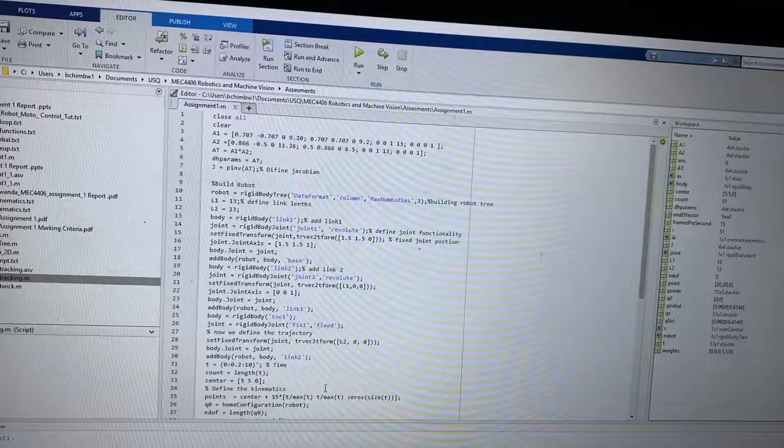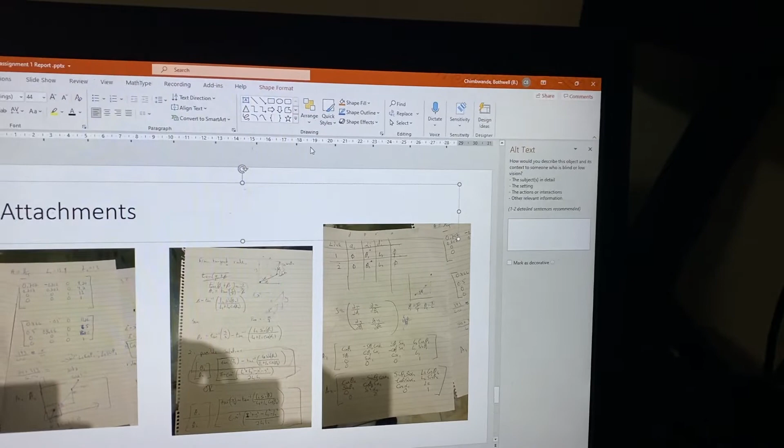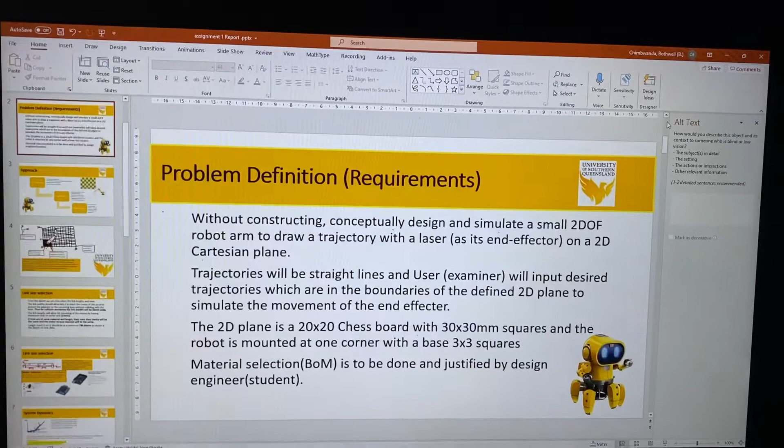My name is Bothwell. I've got here in front of me my assignment for robotics and machine vision. The task was to create a 2 degree of freedom planar robot that would operate on a 20 by 20 grid system, whose grids are 30 by 30 millimeters square. So the whole board would be 600 by 600 millimeters, and the robot, meaning the base, is meant to be located in one of the 4 corners. I chose the left bottom corner.

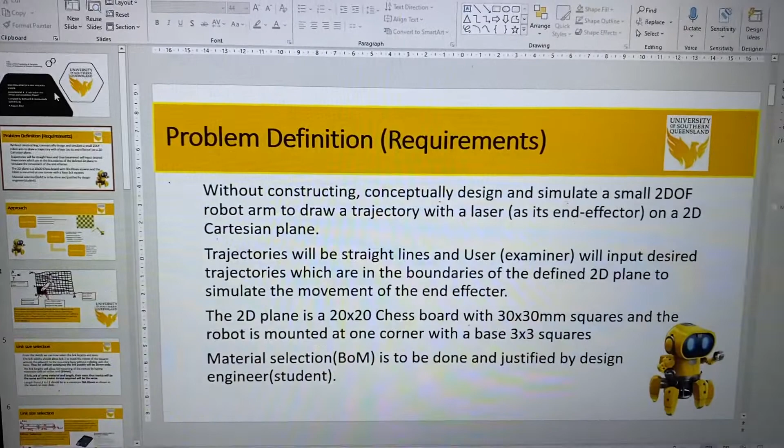This presentation is what I've tried to make. I won't go into presentation mode since I've saved this as a PDF so I can upload it to the submission portal. So now if I go to the second page, here's just the problem definition.

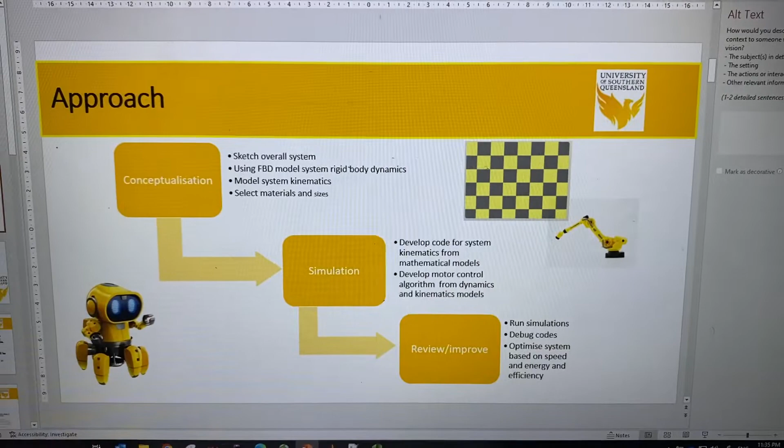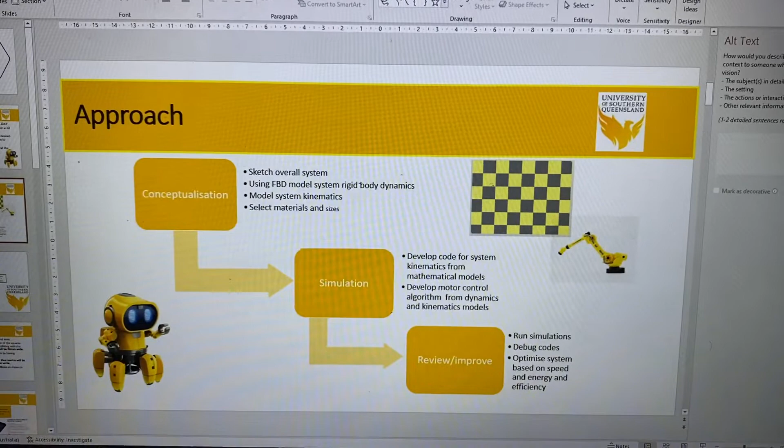The third page is the approach that I took. I did conceptualization, sketched the overall system first, and tried to come up with a design of what I'd expect it to look like and how it would operate. It's also part of the question to do the simulation, review, and improve. So this is the initial sketch that I came up with.

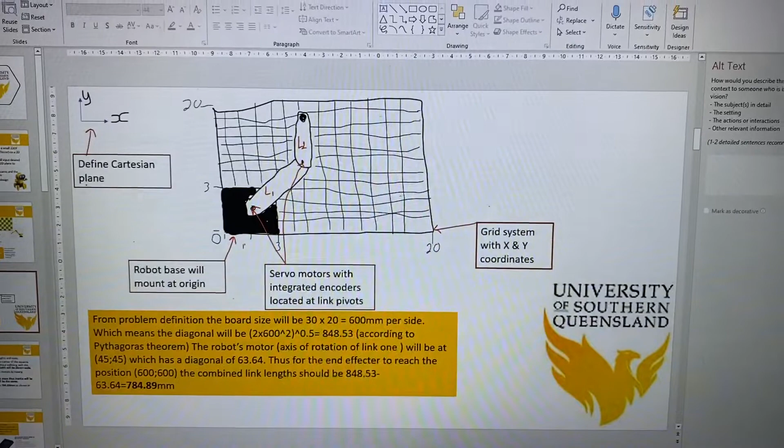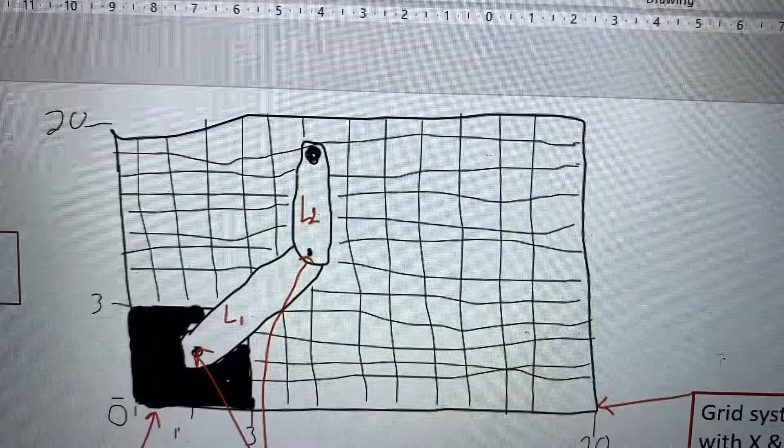So it's a 2-link robot. It would be operating from the left hand corner, and it also mentioned that it would occupy a 3 by 3 space, so that's what it would probably be like. My robot needs to operate around that 3 by 3 square, meaning I should make sure the end effector doesn't collide with the base.

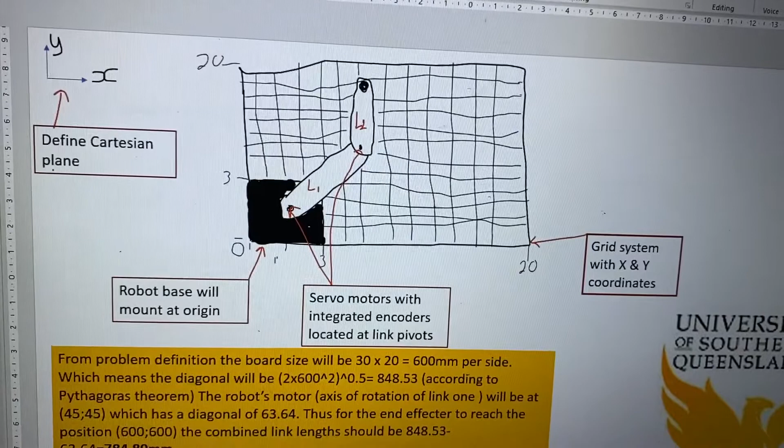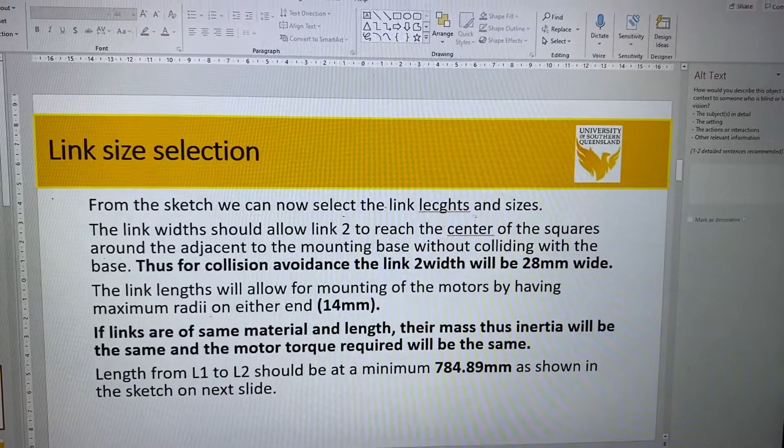So I went on to link selection, which I used basic trigonometry to calculate the links. Given that I need to cover most of the board, I figured it needed to get to that top corner right there, and that's how I calculated the links.

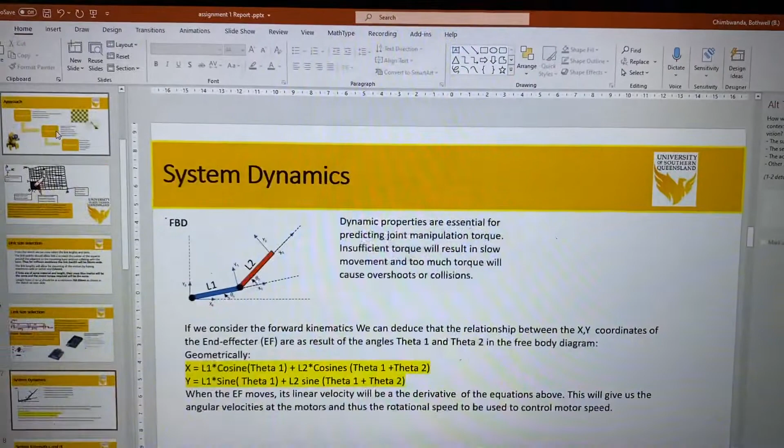For the motor selection, I just looked at what's available and cheap. Jaycar was my best bet, because I normally buy all my little toys and stuff from Jaycar, so that was my first pick.

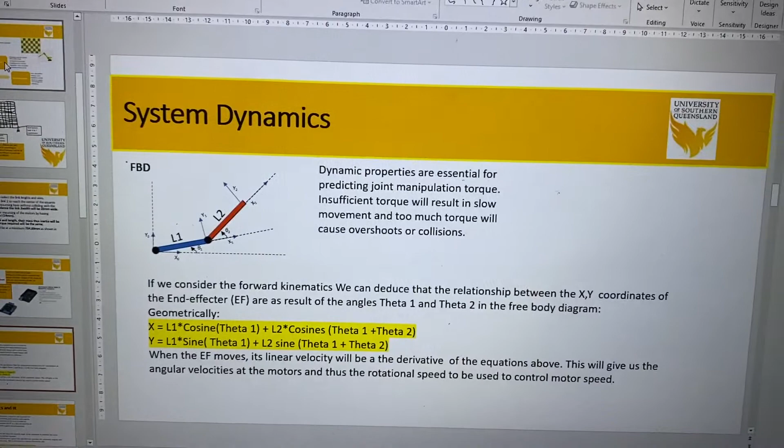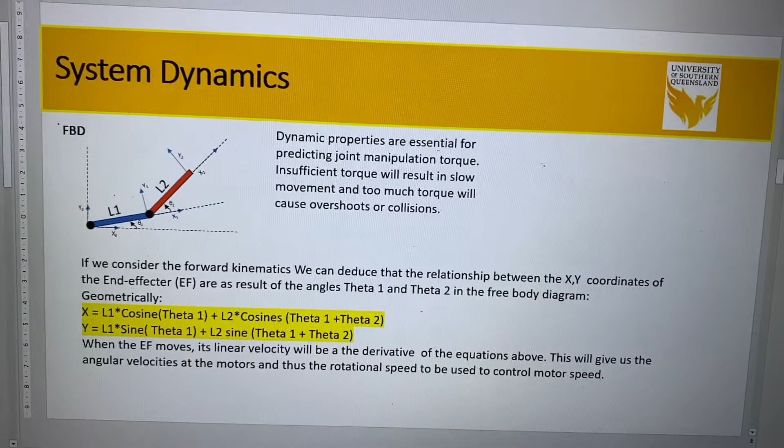Then I went on to analyze system dynamics. Here I was having difficulties because I think I had digressed from what the question really wanted, but I figured if I'm going to do motor control, I needed to do the dynamics as well, since that's where I'd get the torque joints, the inertias, and things like that. I didn't complete them, but I highlighted their necessity in this slide.

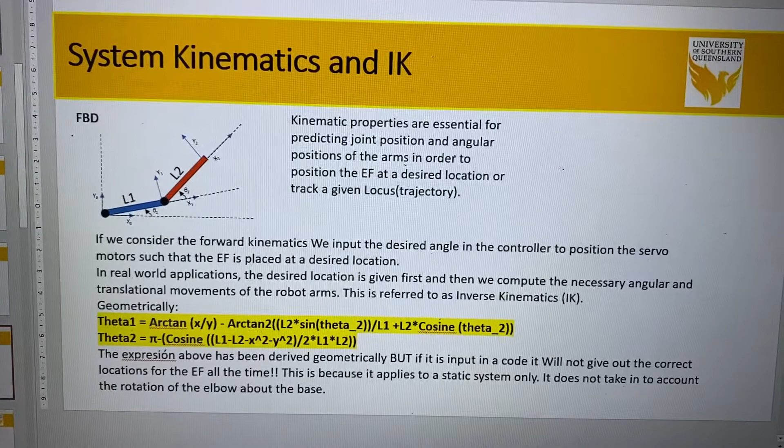I then went to do the kinematics, focusing on the forward kinematics. I talked about the inverse kinematics a little bit as well.

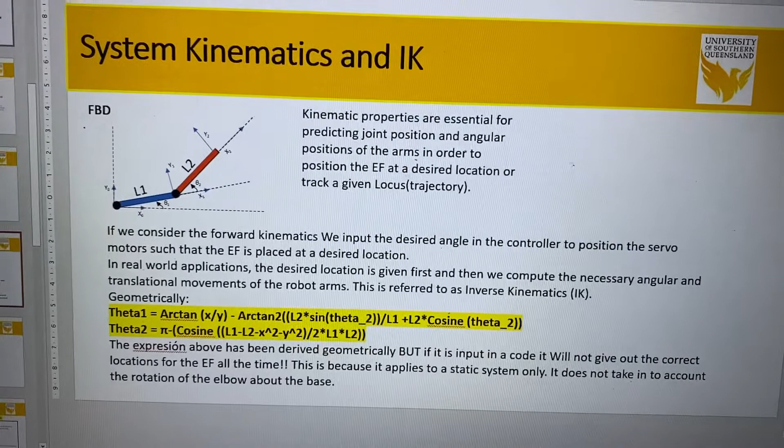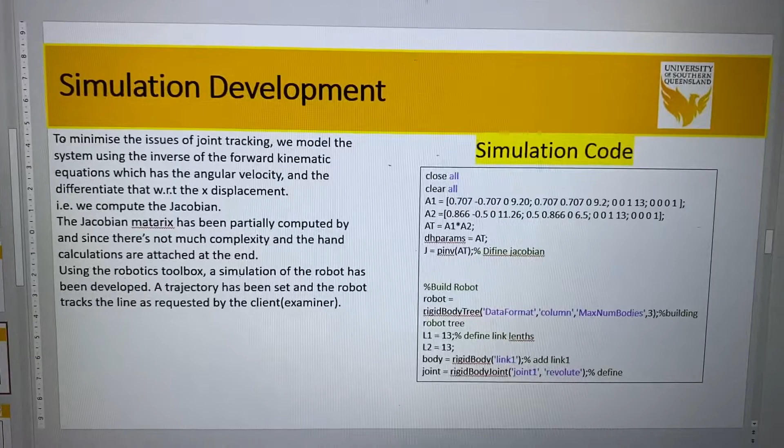Here I tried to do my first simulation, and it didn't work, but I uploaded the code anyway. The difficulty I faced was trying to create the robot in MATLAB and simulate it. I went on to find examples I could follow, and then I managed to create the robot.

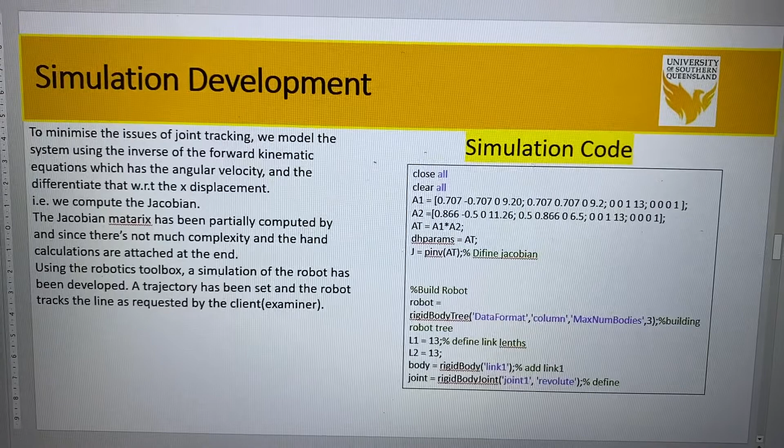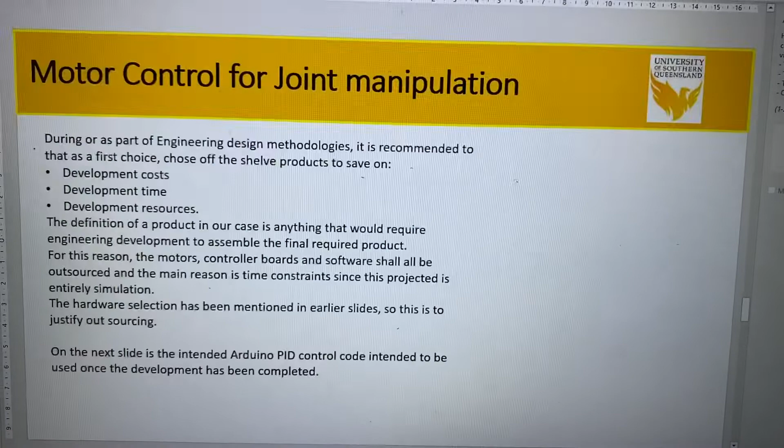In this slide, I have the code which I actually used for my simulation. I talk about the joint control, and this here is the motor control—the Arduino code for the motor control. It's incomplete, but that's it there.

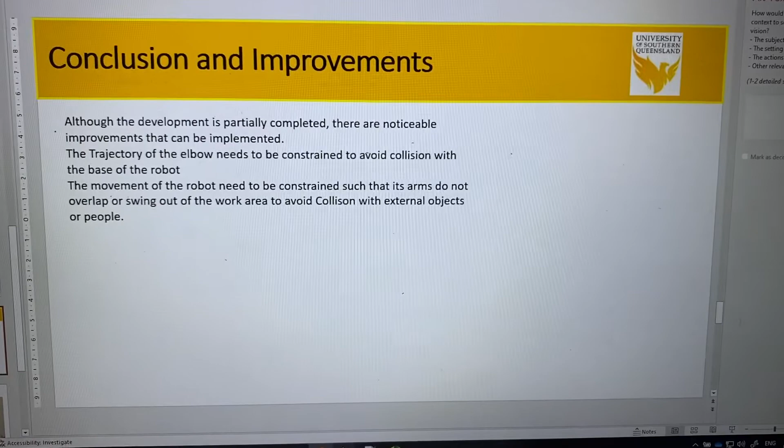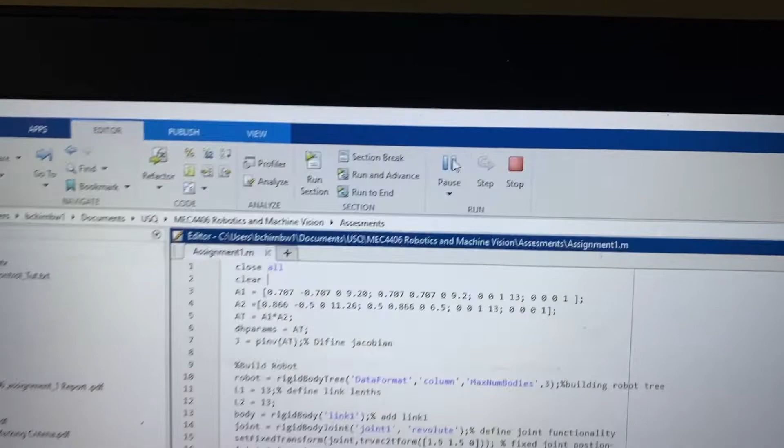So I'll quickly run through my simulation so you can have a look. I've got MATLAB opened already. I just put close all, clear all, because I was running it. If I press run there, you'll see at the bottom it's busy, and then we'll see what happens.

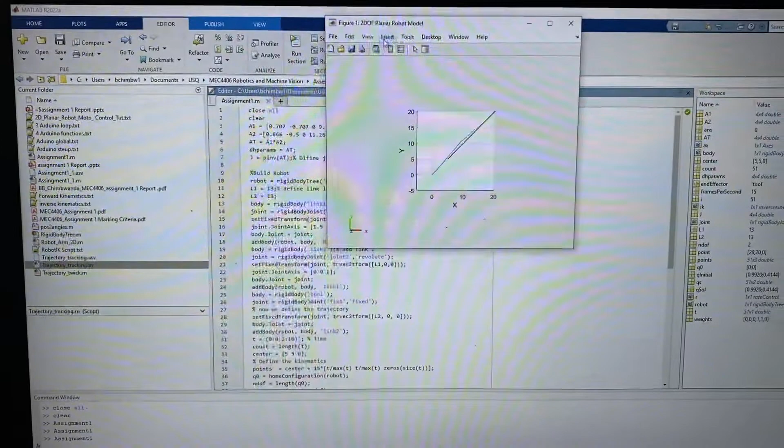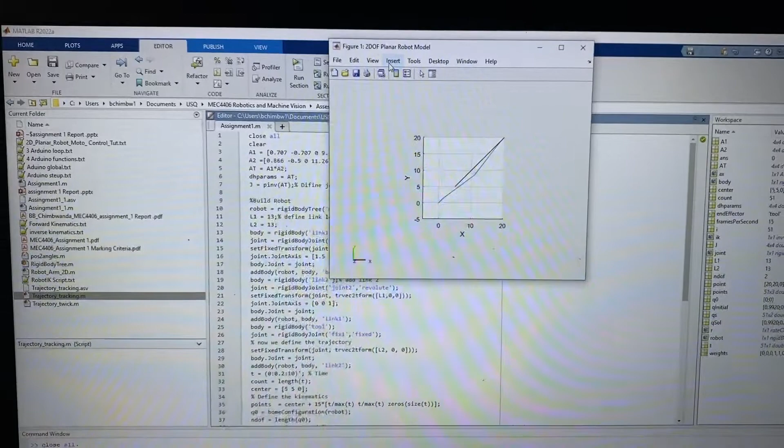So that's the short video of my simulation there. There's still lots of improvement to be done, because I still haven't gotten my joints quite smooth, and I need to try and focus on how to sort the trajectory so it doesn't blip. I don't know whether it's a graphics thing or not.